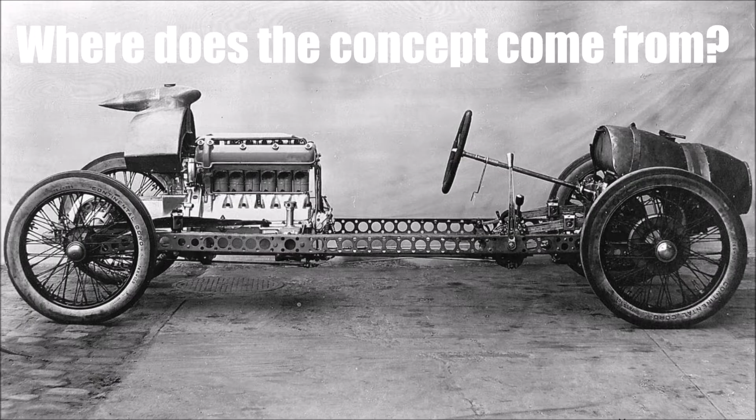Today I would like to have a closer look at the history of mid-engine cars. Where does the concept come from? How did it find its way into motorsport? And what does this have to do with the long overhang Audi architecture?

Let's start with Edmund Rumpler, a young Austrian engineer who worked at Daimler in 1900 and changed to Adler, a popular German car manufacturer at this time, where he became chief engineer in 1902. In 1903, he developed the swing axle in an attempt to control the back wheels independently rather than using a live axle, and he was holding a patent for this.

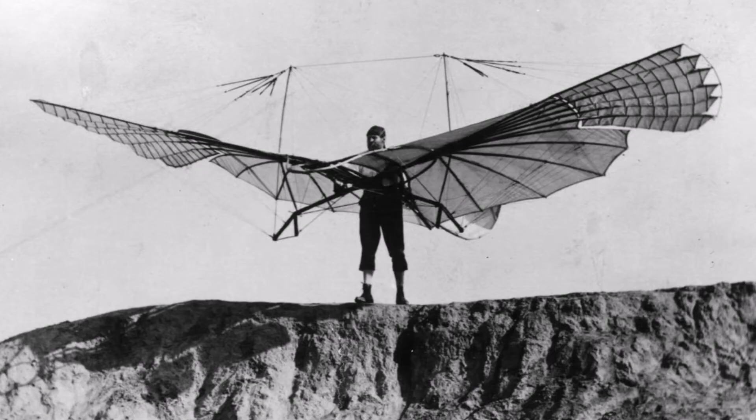Three years later, he moved to Berlin and founded his own engineering office, and in 1908, he registered the company as Aircraft Company, with one month delay, the second aircraft company in Germany. Aircraft were the new engineering trend, and Rumpler wanted to be part of it. But how can you run an aircraft company if you have never built an aircraft before?

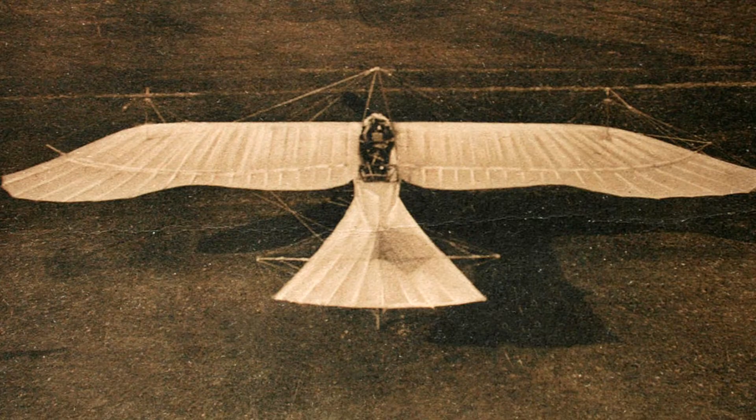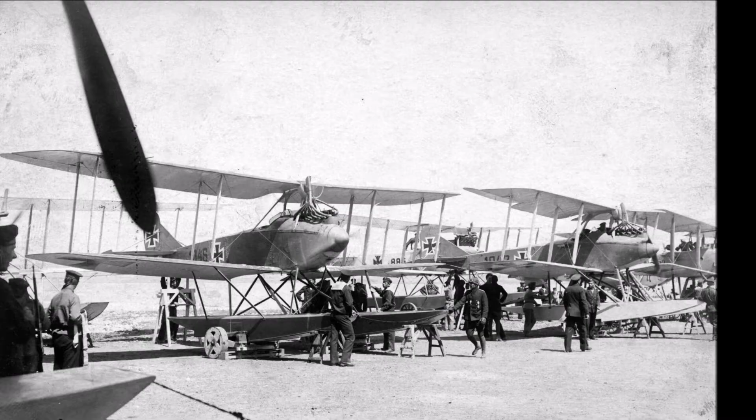Rumpler went to his fellow countryman Etrich, who was producing the Etrich Taube, and they agreed that Rumpler could build this plane in Berlin under license, the Rumpler Taube. Rumpler's company could gain a lot of experience from this plane and optimized it. Soon the Rumpler Taube became a very popular aeroplane because of its stable flight characteristics. With these experiences, Rumpler designed many aeroplanes that became very popular during the First World War.

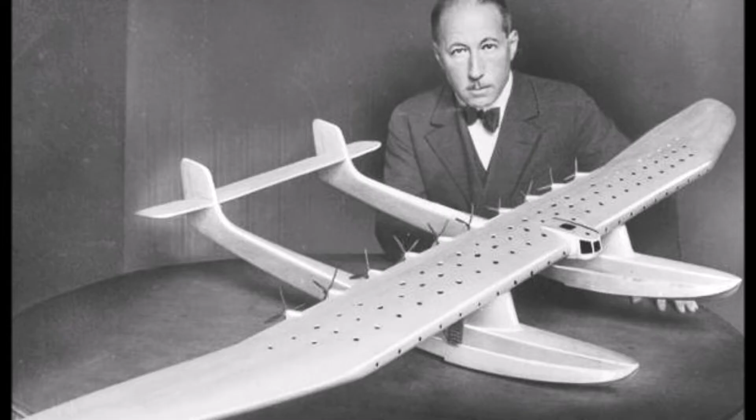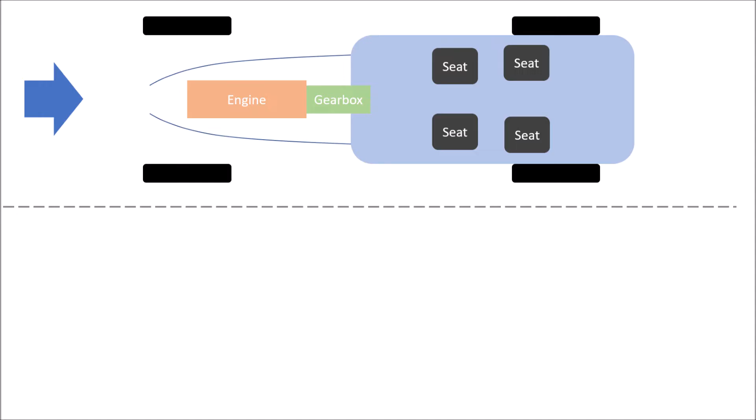After the war, aircraft production was prohibited in Germany, and Rumpler started to develop a car. He used all of his experiences with aircraft and started with a clean sheet of paper. Production cars at this time had the engine in front, then the gearbox, then the greenhouse, and would drive the rear live axle. With a rear live axle, the drive shafts don't have to be angled, so it's the easiest design. Rumpler wanted to create a car with a teardrop shape, so the widest and biggest volume should be at the first third of the car.

The slimmer and smaller elements can be positioned towards the back. So Rumpler positioned the greenhouse first, and to create a smooth leading edge, he positioned the driver at the very front in a center seating position. The four passengers were sitting behind the driver in two rows.

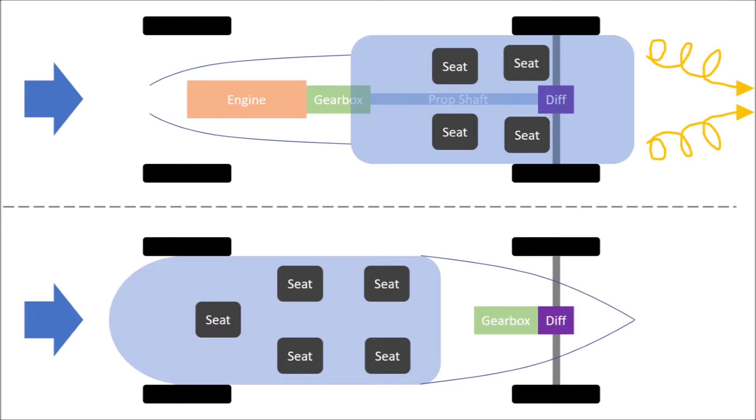So the engine could not be in front anymore, and he simply pushed the engine and gearbox to the back and integrated the differential within and behind the gearbox. That way he saved the prop shaft, and this reduced the weight. The problem of this package was that there was only little space for the engine left if the wheelbase shouldn't be too long. The solution was an unusual W6 engine with 3 cylinder heads from Siemens.

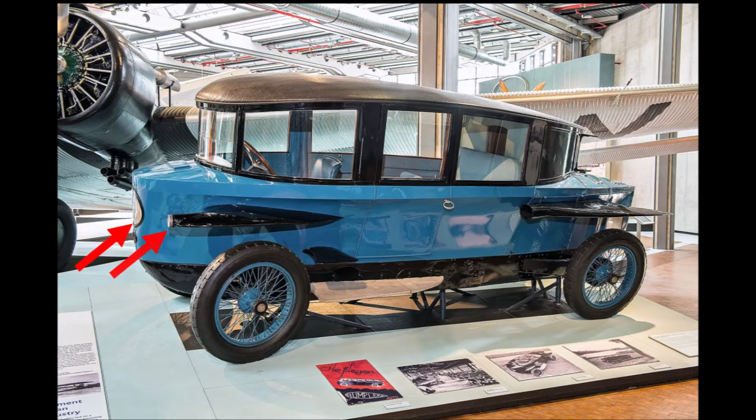At the back axle, he used his patent from 1903 for a new swing axle that offered individual control of the rear wheels. We will see this rear axle concept at many other cars later, including VW Beetle and Porsche 356. Aerodynamically, the car had lots of nice features like the impressive teardrop shape, integrated headlights, lights in the leading edge of the front fender, air intakes in the leading edge of the rear fender, two hidden spare wheels underneath the cabin, and a fully enclosed underbody. Everything to reduce the drag of the car.

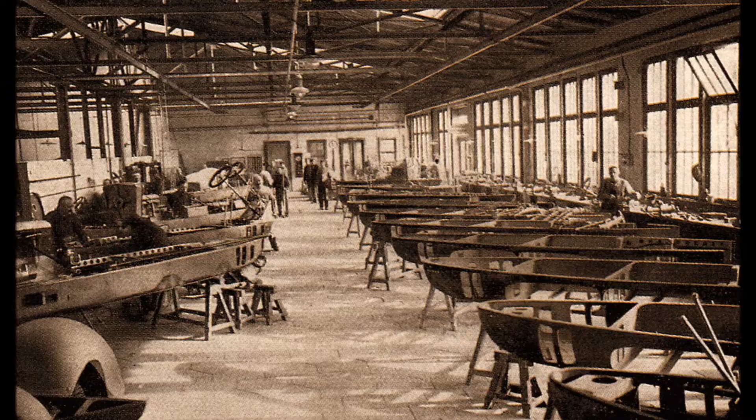At the International Auto Show in Berlin, 1921, Rumpler presented the car and surprised everybody with its unusual design, very good aerodynamics, and genius little tricks. The Rumpler Tropfenwagen was the first mid-engine mass production car, and it was even used as a taxi in Berlin later on. But there were three problems: the engine was unreliable, the steering was designed poorly and wobbled while driving, and there was no space for luggage.

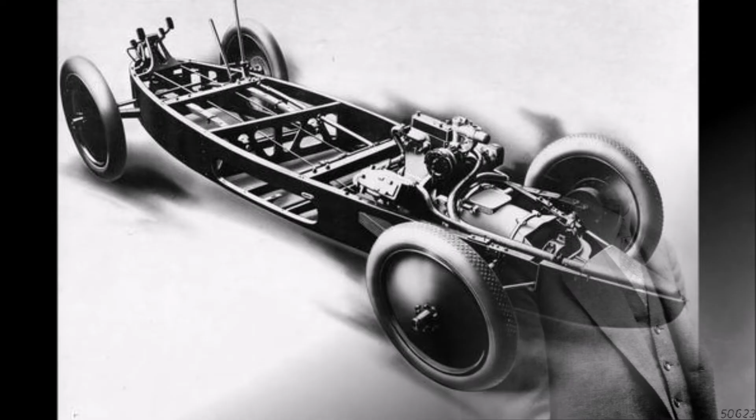But at the presentation, Rumpler got to know Hans Nibel, head designer at Benz. We have to remember that Daimler and Benz were still two separate companies at this time, which were competing with each other. Nibel was impressed by the design, and he made a deal with Rumpler to build a mid-engine car under license. At the same time, they agreed that Rumpler could use a more reliable Benz 4-cylinder engine. This first Benz mid-engine car was effectively a convertible version of the Rumpler Tropfenwagen with the Benz logo.

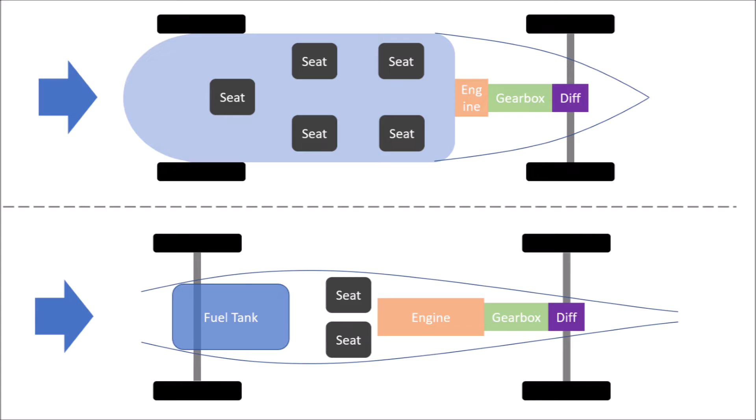With the experience of this project, Benz built its first mid-engined race car in 1923, the Benz Tropfenwagen. It kept the Rumpler concept with the clutch and gearbox in front of the rear axle, and it had a straight 6-cylinder engine. The result was a very long drivetrain, and the 2 passengers moved as closely as possible to the engine block. The front had a live axle right in front of the pedals, and this created a very long wheelbase. The only space left for the fuel tank was above the driver's legs. The curved radiator was placed above the bodywork behind the cockpit.

The car had the advantage that all heavy components were placed around the center of gravity, which made it more agile, and it was very successful in different races.

Also in 1923, Ferdinand Porsche became chief engineer at Daimler, and at this time Daimler and Benz started to work closer together. They would finally merge in 1926, and Porsche and Nibel were working alongside each other.

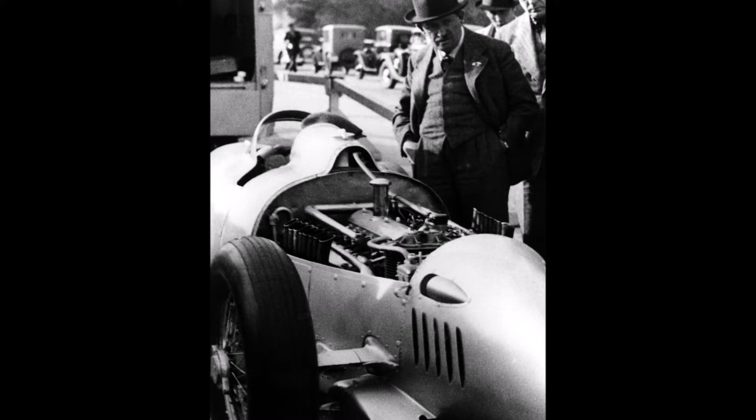In 1928, Porsche was leaving Daimler and he founded his own engineering office in 1931. One of the founding members was Porsche's friend Adolf Rosenberger, a businessman and hobby race driver who was racing the Benz Tropfenwagen privately in the years before. With everything Porsche had heard and learned from Nibel and Rosenberger, he started project number 22, the car which would later become the Auto Union Grand Prix race car.

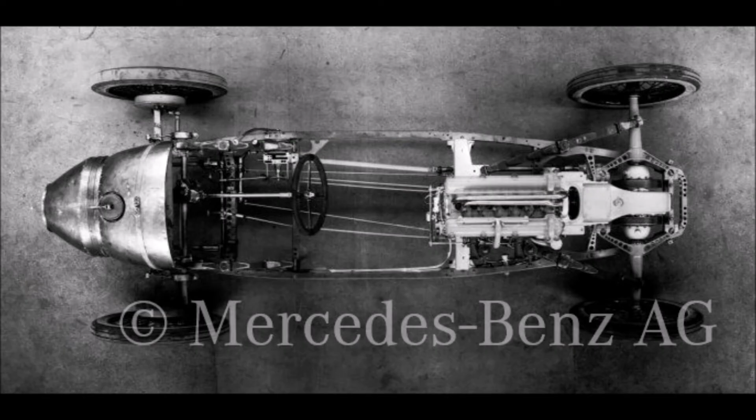Porsche kept the Benz Tropfenwagen concept but tackled its weaknesses and added his own inventions. One of the problems of the Benz was that the fuel tank was in front, and because it was above the driver's legs, it was quite high. During a race, the balance would change significantly. Also, the wheelbase was very long and the car hard to rotate because of the long drivetrain.

To improve that, Porsche moved the gearbox behind the differential and kept the clutch in front of it. That gave much more space at the back. He kept the swing axle construction, but used his invention of torsion springs instead of leaf springs. Then he used a V engine instead of a straight 6 to get more cylinders in about the same engine block length. With the now created space, he could position the fuel tank between the driver and the engine block, right in the center of gravity, and the balance problems during races would be solved.

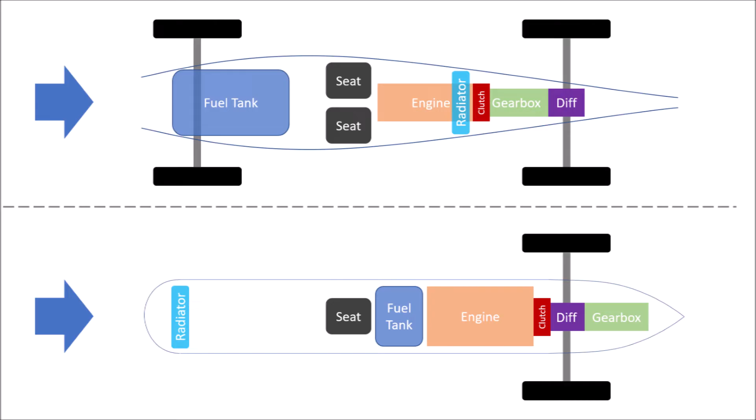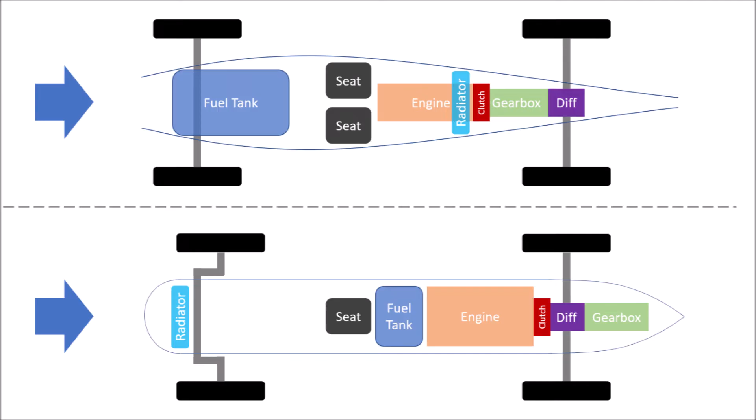To use the cooling more efficiently, he positioned the radiator at the front of the car at the stagnation point, where you have the highest air pressure. Also at the front axle, he used his torsion springs and developed the crank axle to position the axle a bit further back and reduce the wheelbase. We will later see this crank axle in the VW Beetle and Porsche 356 and many more.

The Auto Union race cars were very successful with their unusual design that was well ahead of its time, and you can check out my video about the development details of the Auto Union Grand Prix cars.

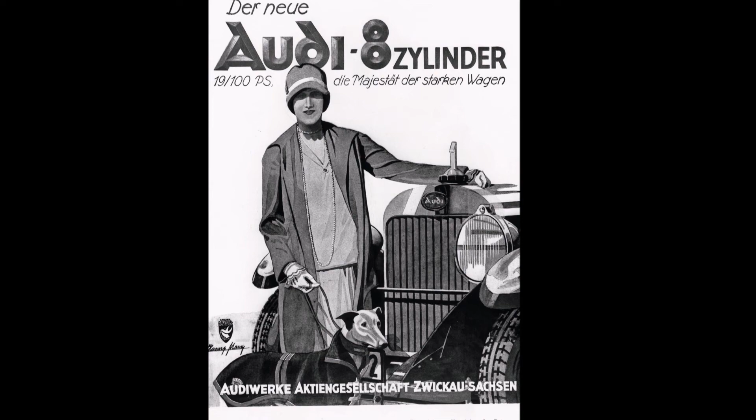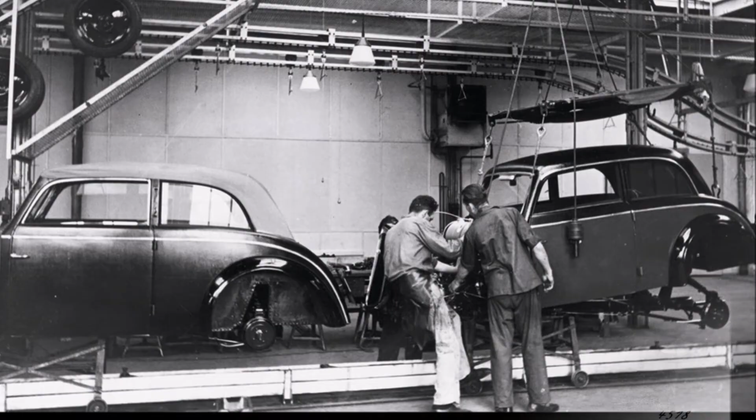To understand the link to today's Audis, we have to discuss the structure of the Auto Union in a bit more detail. Jürgen Skafte Rasmussen, successful businessman and CEO of DKW, the world's largest motorcycle manufacturer in the 1920s, bought the struggling luxury car brand Audi, based in Zwickau, in 1928. He wanted to build the first DKW car, and it was a good deal for him because he could use the car expertise of the Audi engineers and the production capacities of their not very busy production line.

Audis were very expensive and not very profitable, so in 1930 Rasmussen asked the Audi engineers to develop a small mass production vehicle with a DKW motorcycle engine instead of designing big luxury cars. The result was the popular DKW F1. Many versions followed up until the DKW F8.

In 1932, DKW and Audi merged with Horch and Wanderer to form the new Auto Union under pressure from their bank. In 1933, the Auto Union bought the Grand Prix race car design from Porsche and was operating the race cars from their factory in Zwickau.

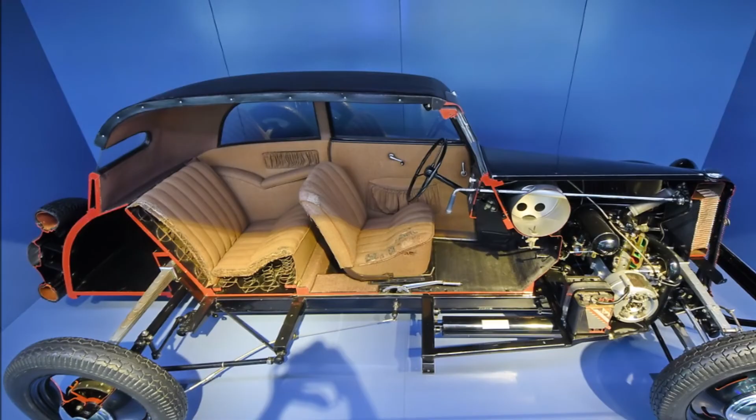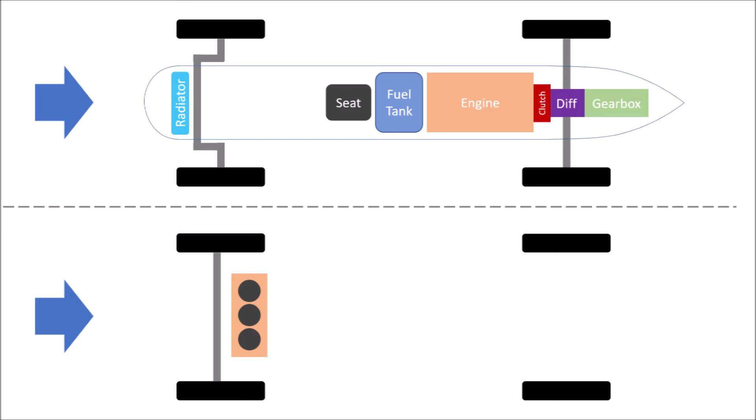In 1937, DKW needed a 3-cylinder engine in the road car but wanted to keep the popular front-wheel drive. So the job for the Audi engineers was to package the longer 3-cylinder engine and the gearbox on the driven axle. The engine was too wide for a transversal layout, so they turned it 90 degrees. But the question was, how can we package a longitudinal gearbox on the driven axle?

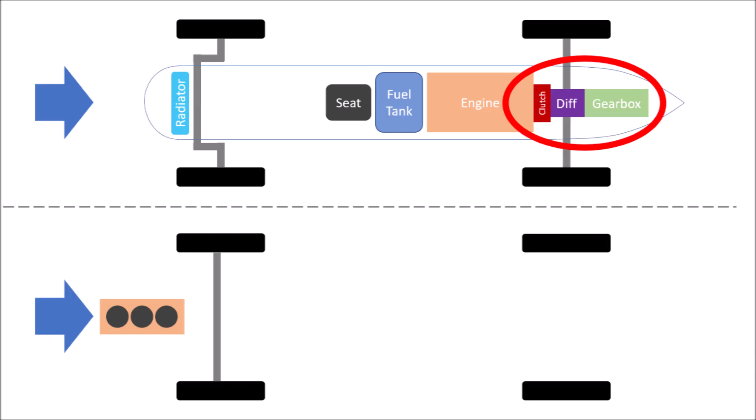They found the answer downstairs at the race department that was running Porsche's unusual gearbox design already for years in Grand Prix racing. They scaled the design down, placed the engine in front of the axle, and that was the solution for the new DKW F9.

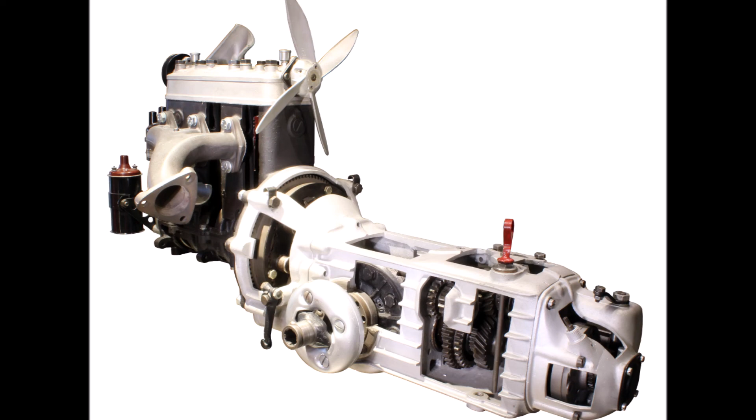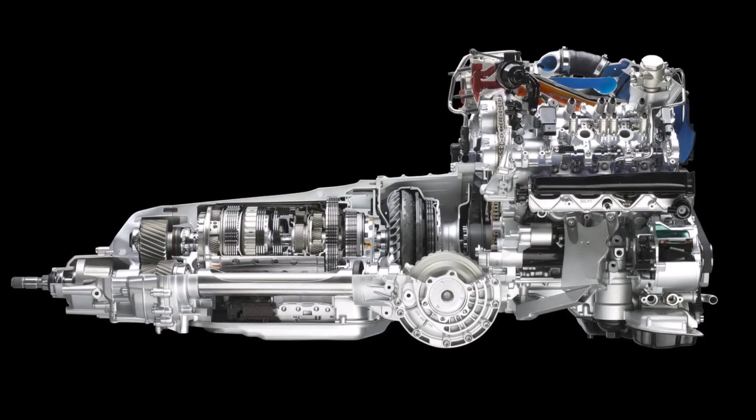That concept was used again, and if you want to see how this design developed further after the war, you can check out my video about the Audi packaging problem. So the explanation why today's Audi drivetrains are so popular for mid-engine cars is because the drivetrain concept came from a mid-engine car in the first place.

Here are some examples of mid-engine cars with an Audi drivetrain: the record-breaking Gumpert Apollo, the Spyker C8, and the Koenigsegg CC, Koenigsegg's first ever car.